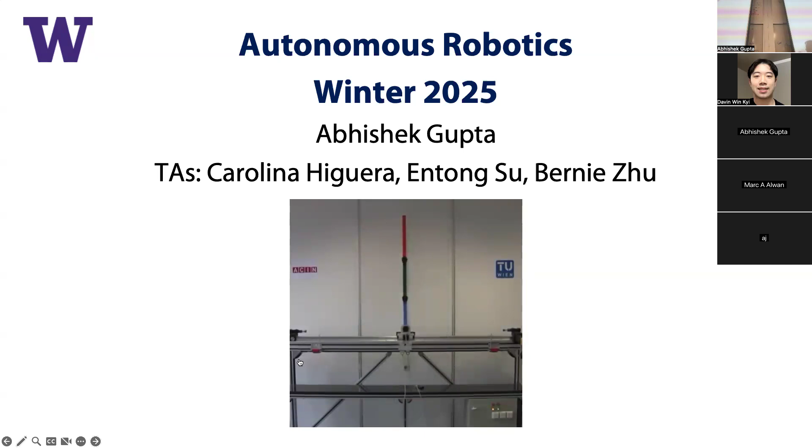This is an example of a pretty classic control system. This is a triple pendulum, but you learn to control this thing to swing up and stay stable. A lot of the methods you guys will study can solve these kinds of systems.

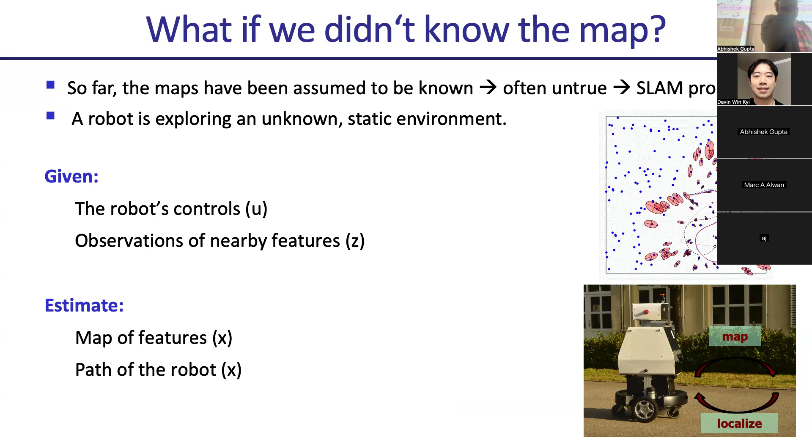So what we did so far is assume the map is known, use that to define the observation model. What we do here is try to treat the map and the position of the obstacles as things that we infer. The SLAM problem is interesting because you have to jointly infer the map and the position of the objects.

So why is SLAM difficult? In localization, what we did so far, we assumed that the map is known. The only uncertainty is coming from the robot's position. But now you're saying that the map is not known, and you have to do both jointly. It's kind of like if I don't know where I am and I don't know where the map is, then I'm kind of reading tea leaves a little bit. So SLAM as a problem is quite hard.

Unless you use learning-based methods, but SLAM tends to work really well, so you could form maps like that while you're moving around the environment.

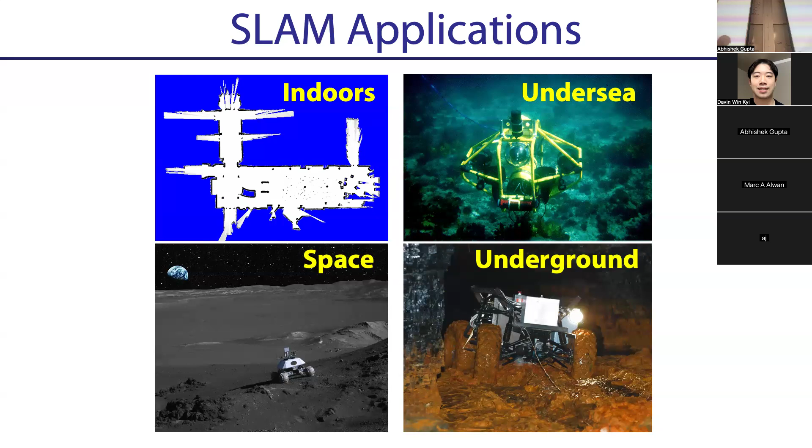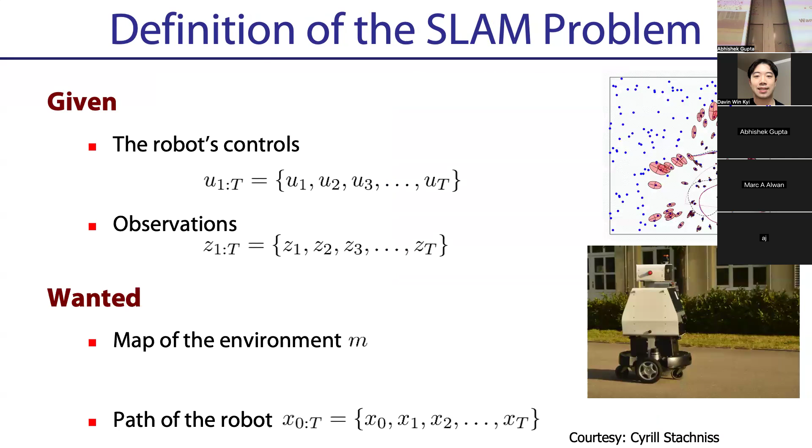So generally, the definition of the SLAM problem is that you're provided the actions of the robot, you're provided some observations, which is like LiDAR measurements in different directions, and you are trying to do inference over the map of the environment, which is usually represented as a series of landmarks, and the path of the robot, which is the position of the robot at any point in time.

And so the way you kind of solve it is through Bayesian filtering. You treat it like a Bayes filter, it's just that you expand the state. So you treat it as the normal Bayes filter, but instead of just treating the state as the position and orientation of the robot, you also include the position and orientation of the landmarks as part of your state. You're doing inference over not just the position of the robot, but also of the landmarks. And so you can use the whole machinery from before, you're just expanding your state.

We won't have time to go into EKF SLAM in detail, but the point here is that you're going to try to have your state space be something like X, Y, and theta, like before, but also include the position of all the landmarks — landmarks being obstacles in the world or special features you're trying to find. So you get X, Y, theta and the position of all the landmarks, and you're trying to estimate a belief over this whole thing. The belief is going to be no longer three-dimensional, but 3 plus n times 2.

If you want a more detailed version of this, look at my slides from CSE 571. I have two lectures on it, but we won't have enough time to go over it here.

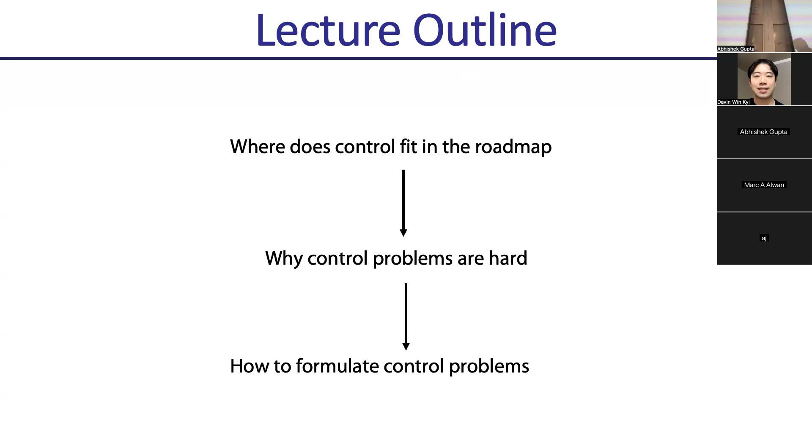Let's start by going back to the helicopter from lecture 2. We had this loop where we said we're going to have a world model. The world model tells you how the world works—it's a simulator. And then we said the world model needs to know the state of the robot to predict what's going to happen forward, and that's what state estimation does. State estimation says, given what you've seen, this is where we think the robot is. You stick that into your world model, and the world model will tell you, given this is where you think you are, if you take this control, this is where you're going to be in the future.

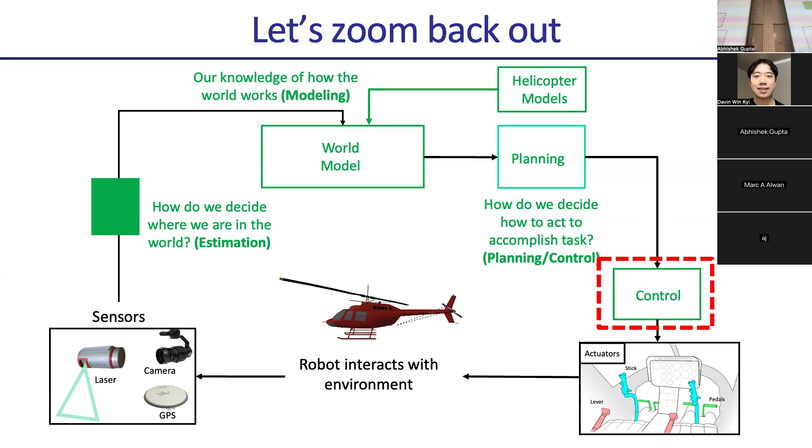What planning does is, given your world model and your state, decide a course of action. Like, let's say I'm going from here to the Ave—I navigate to the fountain, then navigate somewhere near the Red Square, then cross the bridge, and so on. So planning gives you a relatively coarse path, and control is what lets you control your joints to actually follow that path. So the difference between planning and control is really a granularity difference, but the methods are a bit different.

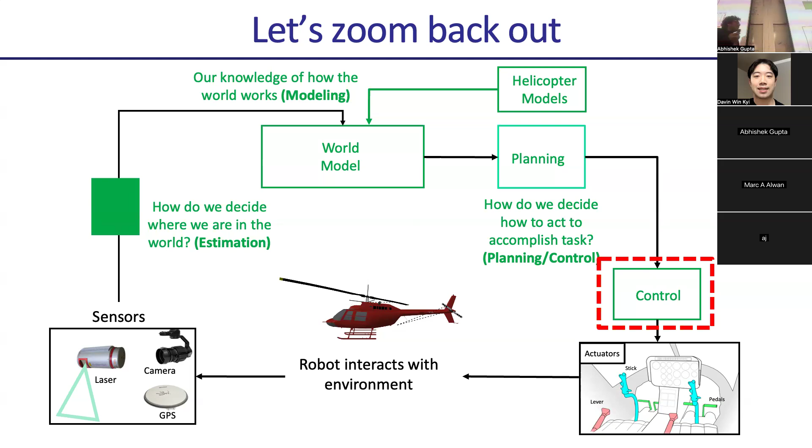So we're really going to think about control, which says that once you've done planning, you know what path you want to follow—how do you follow that path under disturbances, under noise, under model error? We're not going to worry about how the path shows up yet; we're just going to try to follow a given path.

So generally we have the sense-plan-act paradigm. We've started by estimating robot state, then you do planning to get a sequence of paths to follow, and then control—which is what we're going to do next—is trying to control the robot to follow a particular plan when you have disturbances or errors in your model.

We tried to solve this over the last couple of weeks. We're going to assume planning is solved for now—we'll come back to it in a few weeks—and think about control. Given a path and an estimate of state, we're not going to worry about state estimation or planning. We're just saying, given a state and where you want to go, how do I follow the path under some disturbances?

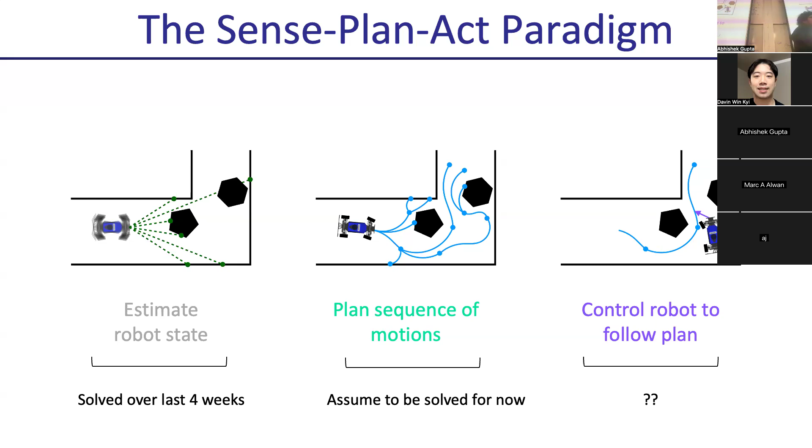One way to think about control: in state estimation, you were sitting in the passenger seat, saying the system is going to be driven—the controls of the system were given, and we never thought about controlling the system. Now we're going to move to the driver's seat. We're going to say, hey, we can actually control the system—what do we control it to do? It's kind of like moving from a passive sensing paradigm to an active one. You want to act in the world.

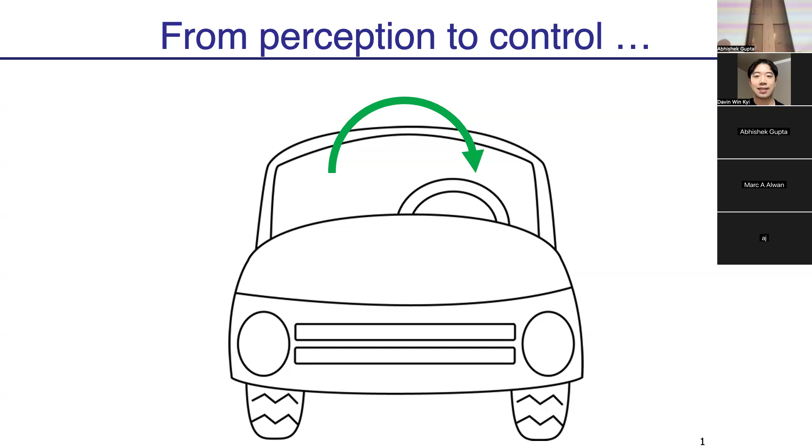So what do we get from control? Well, hopefully we can get things that look like this—this is like an extreme parking situation. That was kind of cool. So it's this car that's trying to reverse park.

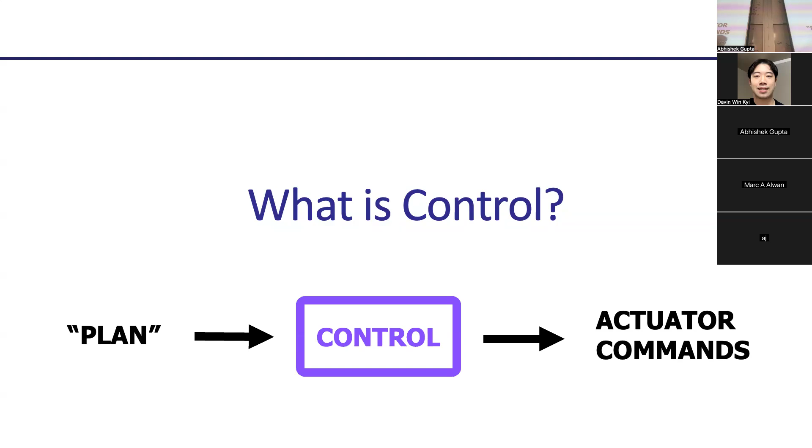So what is control? Generally, control is saying that you have a plan. You want to figure out how to map to actuator commands under some set of disturbances in your environment. You'll assume you know a model of the world approximately, but you're trying to figure out how to use that model to achieve waypoints. You're not going to do global planning. You're going to try to achieve the next waypoint, which is local, short horizon.

You're trying to track this path, so we're going to try and do control problems that are tracking problems. Often you'll have like a helicopter with a charted path, and you want to do it under disturbances. This is called our reference trajectory. A reference trajectory, the first way of thinking about it, is that at time step t, you want x to be something, y to be something, and theta to be something. It's defined as a time-varying function of x, y, and theta. We need to figure out what controls we'll feed into our system in order to accomplish this path.

So now the question is, why feedback? We're talking about feedback control. When I say feedback, I'm talking about a system which acts, takes in its errors, goes back into the system, and changes its behavior. Why feedback? Why not just say, given a model of the world, like the kinematic car model we talked about, why not just choose the best U, choose a sequence of U's that accomplish a trajectory, and just run them?

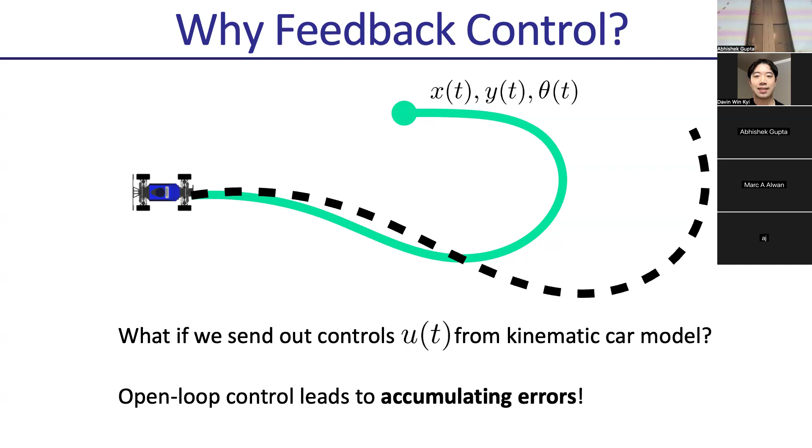We deviate and then... exactly, exactly. So the challenge with doing this kind of open loop control is that it's like dead reckoning—your errors will keep accumulating. You make a little error, and a little error, and a little error, and you end up way, way off. This is harder to think about for a Roomba, which is going really slow, but imagine you're an F1 car and you're playing things open loop, the driver is not touching the wheel. That's a scary situation. In general, the idea of feedback is that because your model is wrong, because there are unknown disturbances in your system, you want to use the errors that you make in order to correct for things. You're always correcting for little mistakes. If you look at the way you drive, you typically end up correcting a lot of your mistakes constantly, and so most control systems are feedback control systems. By feedback, we mean things that use errors you have experienced in order to affect your future behavior. That's often called closed loop control or feedback control. Open loop control is just generating a sequence of controls and playing them one after the other. Open loop control is typically bad. Closed loop control lets you deal with model errors, changing systems, and so on.

The idea of feedback control is that you measure the error between your current state and your reference trajectory, and you use that to go back—you deviate this way, you go that way, deviate that way, you go back this way. The question is, how do we design a rule that goes between this error and how to control your system? The problem of feedback control is using this error in order to design how to take actions in the world.

So you have a reference trajectory you're trying to hit. You want to design a rule that goes from error to actions. That's the feedback control.

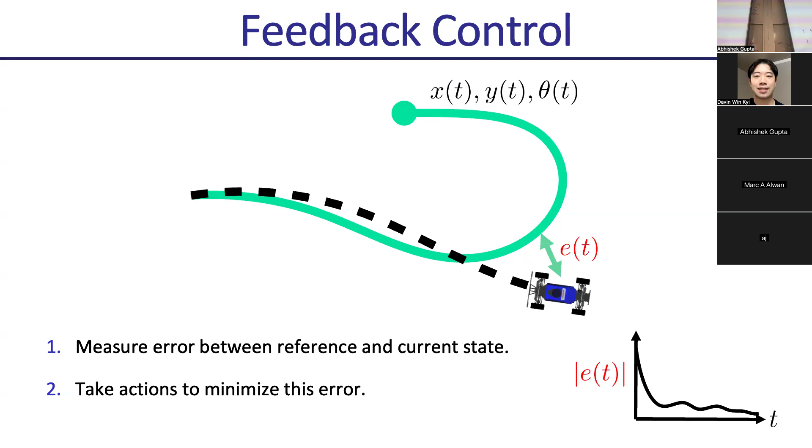One way of thinking about this, which is often useful, is to think about it as a vector field. If you're here, you would go here. If you're here, you would go here. If you're here, you would go here. So it's not saying what control to take, it's more like a rule on how to act depending on what your error is.

If you're familiar with learning, it's kind of like a policy. A policy is typically closed loop, or you can think of it as a set of rules which say how to map your error into controls that bring you back on track.

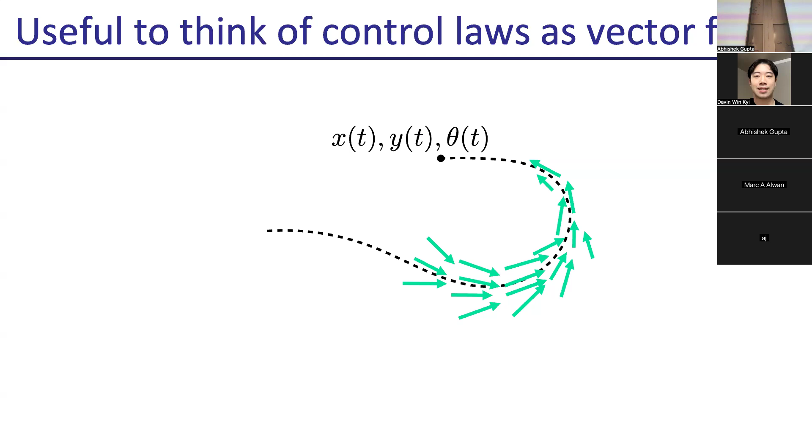So a natural question is, we've heard about control for the last 30 years. It's still a research problem. Why is this still hard?

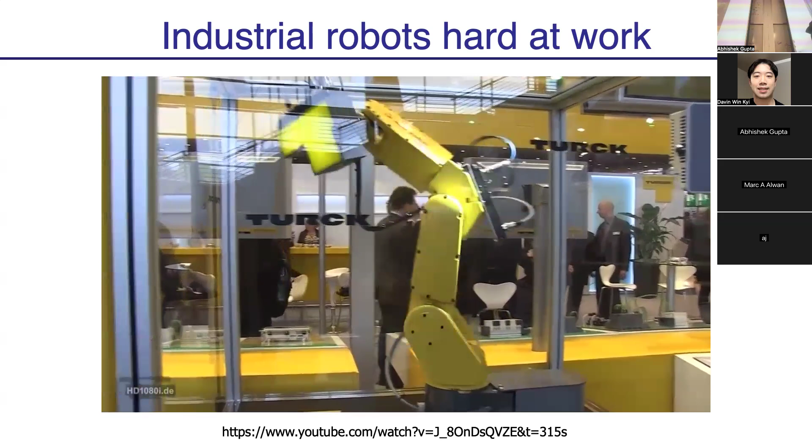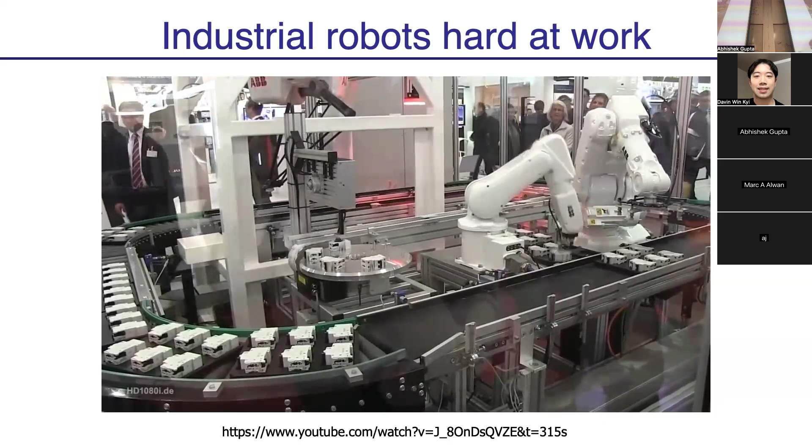If you look at a system in a factory, for instance a system trying to do packing or assembly in these nice clean cages, they often work really well. You don't have that many disturbances, your system's pretty controlled, your set of objects is known beforehand, and you don't have to be that adaptive.

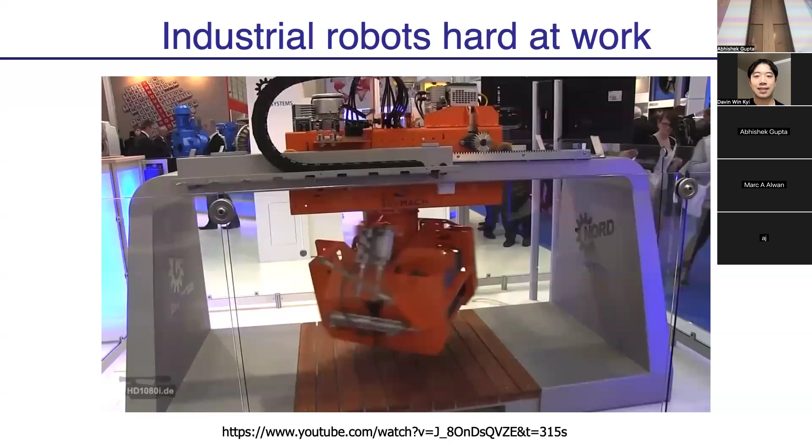You don't have to really deal with lots of unforeseen things. So you do use feedback even in these systems, but they're very controlled. The thought here is that these systems make assumptions. One is that the system is fully actuated, you can control everything in the system perfectly.

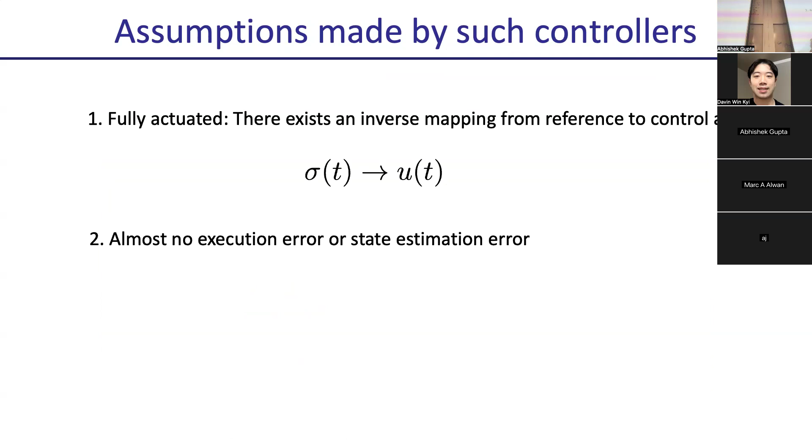Secondly, there's very little execution error. You buy these $200,000 robots, they repeat the same thing over and over. You go to the robotics lab, our robots cost $500, and they make lots and lots of errors. They don't cost $500, but more, not 200,000.

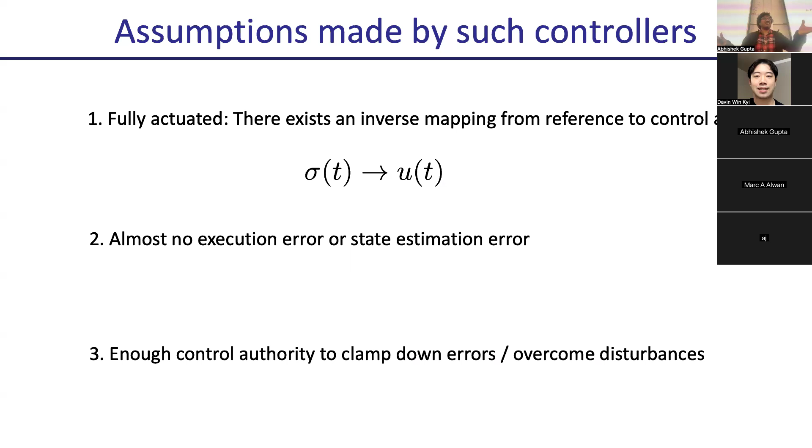And because the environment is controlled, you can kind of kill the errors and disturbances in your system, because it's a factory, you can control the factory. But if you're like Boston Dynamics and you're trying to get your humanoid to jump and do backflips and do flips, that may be a significantly different system.

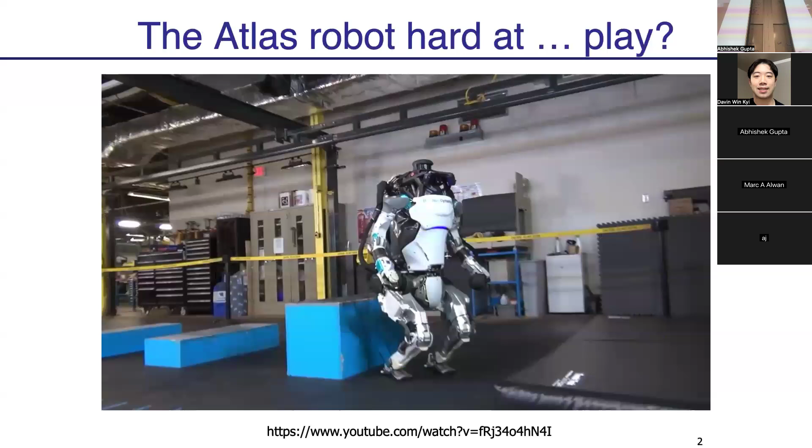So what makes it different? The first thing is that your system is not fully actuated. You can't control everything in your system perfectly. Like for instance, you're trying to pick up an object and you're trying to play tennis, you can't actuate the ball perfectly.

It's an inherently under-actuated system. When you think of an under-actuated system, it's a system where you don't have direct control over all degrees of freedom. Right now, this clicker is fully actuated, I have full control over it. But if I think about pushing this thing on the table, that's an under-actuated system, I don't have full control over it. Most systems in these high performance environments are under-actuated.

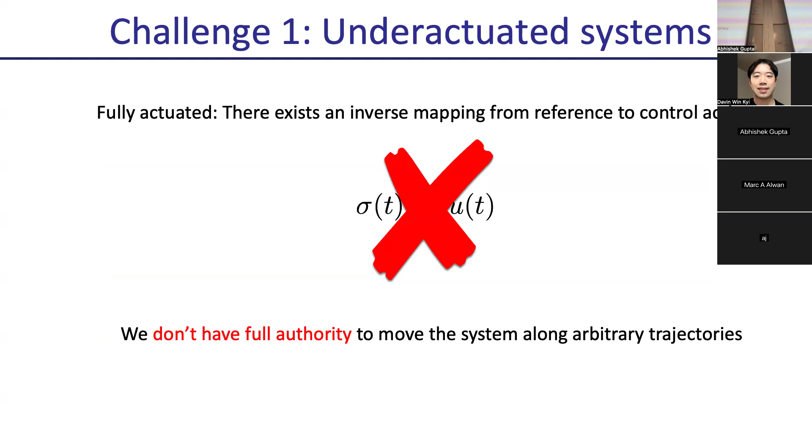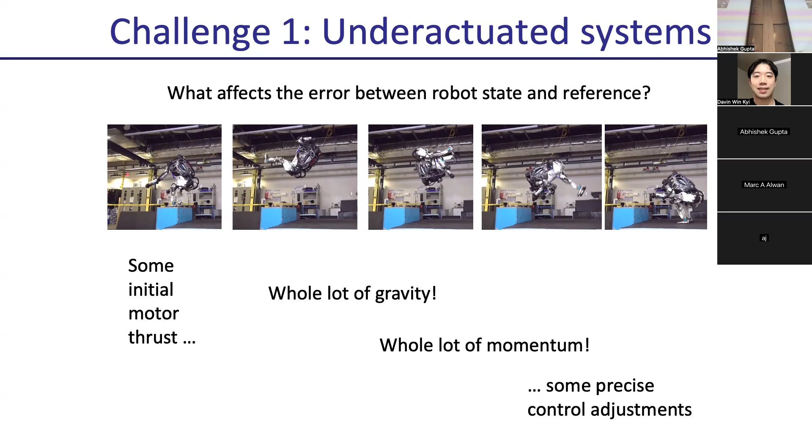And so you can't just teleport to where you want to teleport. You have to obey the dynamics of your system. Under-actuated systems have gravity, momentum, and so on, but you have to use those in order to do a backflip. You can't just directly set the system to where you want it to.

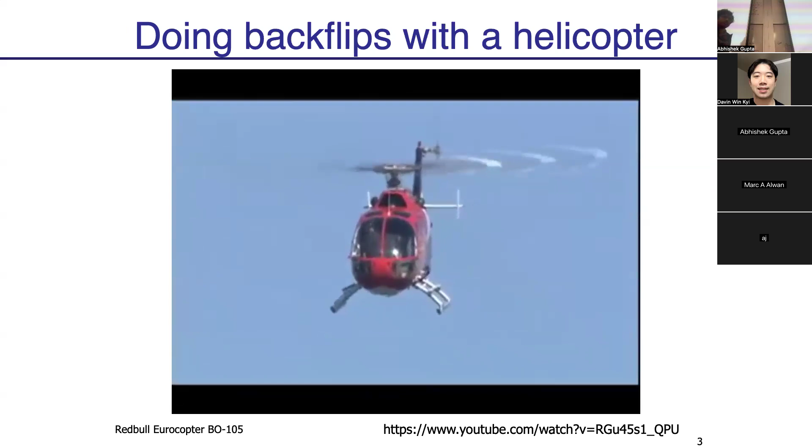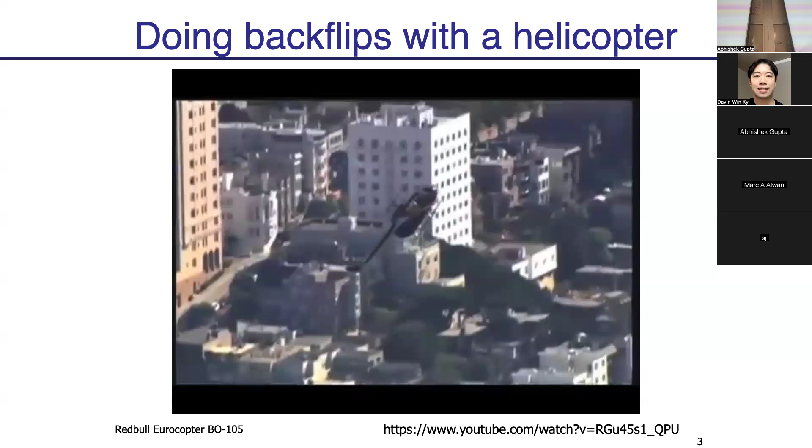The second thing is that you don't really know the model of your system perfectly. For instance, in a helicopter, if you're trying to do backflips, you can build models of your system in certain cases. But let's say you're trying to do backflips in extreme conditions, there's wind, there's drag, there's things like that. It's very hard to model those exactly.

So in most cases, your system model is going to be approximate, which means that if you did planning through that system, it's inherently going to be wrong. If you made a bunch of assumptions and planned into the wrong model, you're going to get the wrong control. But the thing that makes feedback control so beautiful is that it's saying wrong models can still be useful when used with feedback that allows you to correct for model error.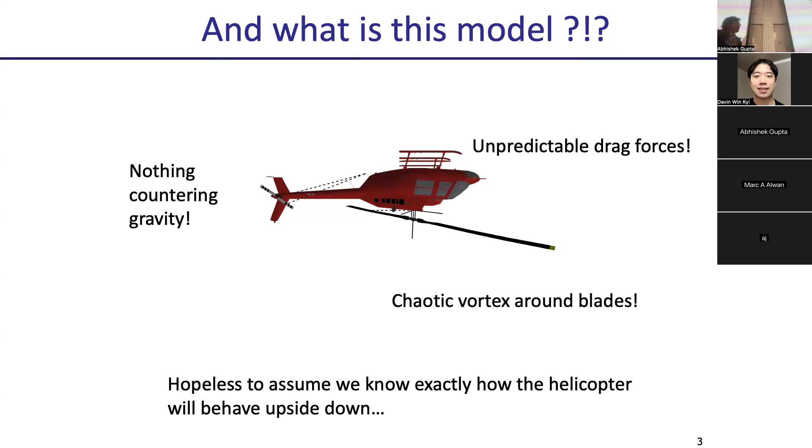The idea is that you can make errors that you will fix in the future. It's like lazy optimization - you're saying I will be okay now because I can correct it in the future. So you're never trying to be perfect in feedback control, you're just trying to be good enough. Even with an approximate, simple model, if you have feedback you can get a well-behaved system. Even if you have a system that's behaving chaotically, as long as you're able to continuously correct for the errors, you'll get a well-behaved system. That's the basic premise of feedback. Does it make sense?

People will keep trying to build better and better models. I think that's maybe the wrong way of going about it. You want to build a model that's good enough to do control. At least in our cases, we don't care about modeling the system perfectly, we just care about it being good enough to control it. And feedback lowers the burden on modeling - the more you have feedback, the less well your model has to do.

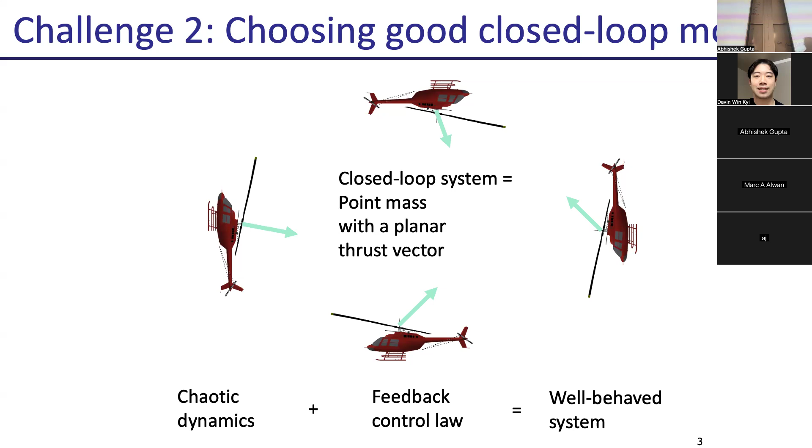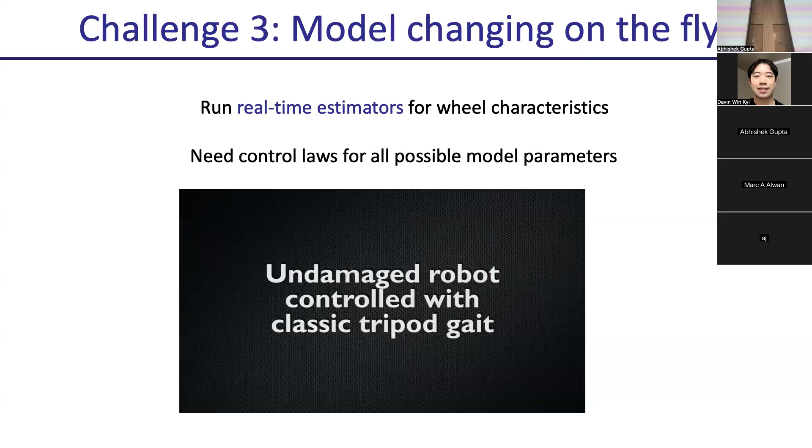The third situation is that often models change on the fly. I was at the DARPA meeting this weekend, and they were talking a lot about robots that are in the field get damaged, and what happens to them then. Here's an example I really like from some folks at Wyoming: the spider robot that gets damaged, but you can see it no longer can walk straight because it's damaged. The model has changed, but it tries to estimate how its model has changed and adapt on the fly. In some ways that is a feedback controller - it's feedback of what changed in the world and adjusting its behavior accordingly. Systems will change on deployment. You deploy a robot for long enough, something will change. Feedback control lets you deal with these kinds of changing models.

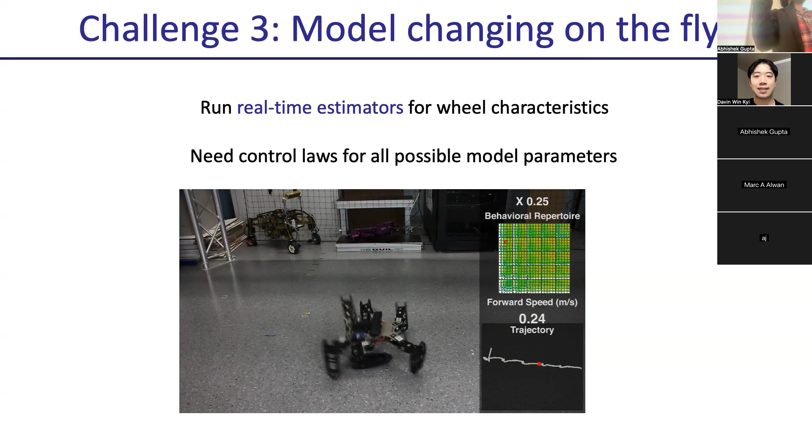Given that, let's think a little about how to ground this in real time. We're going to try to follow a trajectory. We have a car, the state is X, Y, and theta, same as we did before. Now you want to follow a trajectory - the question is, how do you parameterize the trajectory? The first thing we said is we have a time parameterized trajectory. At time step t, you want your system to be at a particular X, Y, and theta. So you have a time parameterized function that tells you exactly where your system is going to be at any particular time. What might be the problem with this parameterization? Why is it not perfect?

Car is slower than expected. Right, if your car is slower than expected, or you have an unexpected obstacle, you're going to end up with this kind of irreducible delay, and you can't really fix it.

Sometimes you really just care about following a path, you don't really care about getting there at a particular time. So a second option here is to do, instead of a time parameterized trajectory, an index parameterized trajectory. Rather than saying I'm going to be at this state at this time, you just want things to be followed in sequence. Let's say you defined k different points in the sequence - you're saying I just want to get to the next one, and after I get to this one, I want to get to this one, and so on. So an index parameterized path doesn't care about time, it just cares about following things sequentially. The nice part about this is that it gets the geometry right - it follows the path you want to follow. The con is that it's untimed - it may be slower or faster than you want it to be.

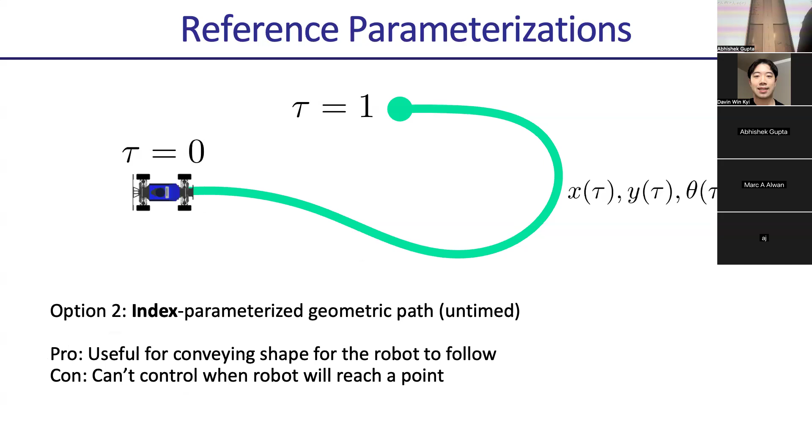Okay, so these are just design decisions you make in a system. Let's say you're a train and you really need to cross another train at a particular point in time, otherwise you're going to crash. You should probably be time parameterized. But if you're like an RC car in a little hallway, probably better to be index parameterized. So it kind of depends on your problem.

But the way we're going to do this is we're going to start by first getting a path to track, then picking a reference state. Let's say your path was like this, and your robot was here. You want to find where you want to go to - that's your set point or your goal, your reference state. You compute your error between your current state and your reference state, and then you try to think of a controller that'll get you back to your reference. So feedback control is typically: take your path, find a reference state, take your current state, find the difference between your current state and the reference state, and then control your system to accomplish that.

And so every controller is going to make some choices. How do you parameterize a path to track? How do you choose which state to go to? How do you compute the error? And then how do you compute the control law to minimize this error?

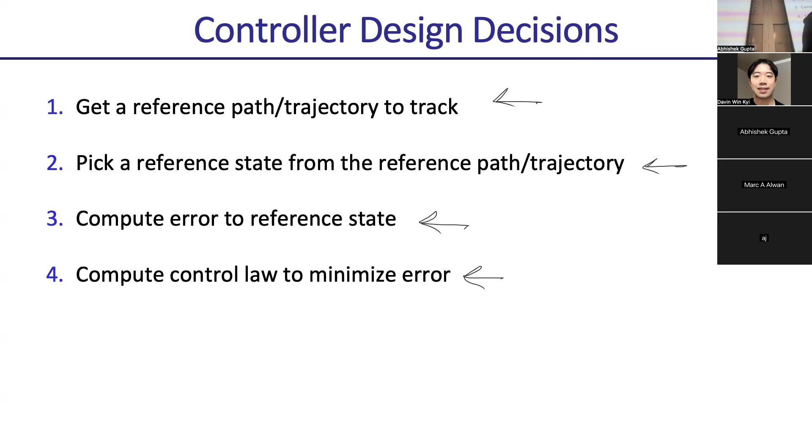Good. All right, so we talked about how to parameterize paths. The next question becomes, how do you choose a reference state? How do you choose where to go back to? So what are thoughts? Let's say you have an index parameterized path, and your state of the world is now X, Y, and theta. How do you choose the reference state? How do you choose what to get back to?

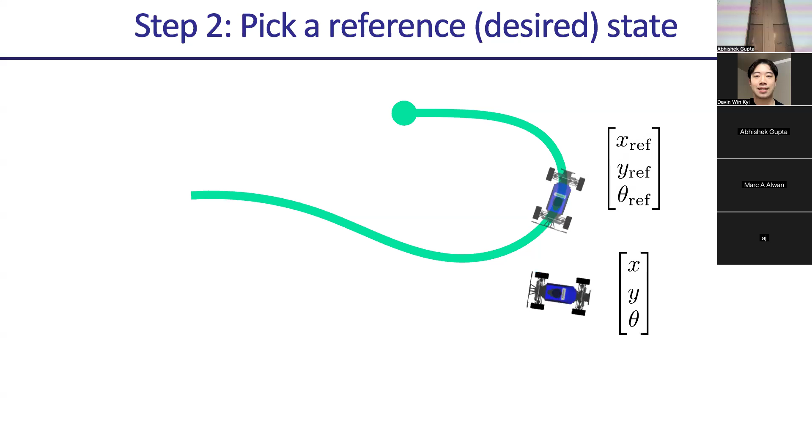Minimum distance from the path. Got it. So the first option is choose a single state that is closest to your current state. You say your current state is X, Y, theta, and you try to choose an X and Y from your path that has the minimum distance from your current state. That's good in many cases.

Why could it be bad? You can keep oscillating, yeah exactly. The other option is if your momentum is taking you this way, but the closest state is this way, you've got to go backwards. So it's not always the best to choose the closest one. What's a different option?

So maybe a different alternative here is a look-ahead search, which is saying you take your X,Y, but find another point, your look-ahead point, which is not the shortest distance, but which is L steps ahead of your current time. This is where you deviated from last, and you pick something ahead, L steps away. You don't want this to be the shortest distance, you don't want it to be zero, you want it to be some L steps ahead. And that often works well. I think that's what you'll do in a lot of your homework.

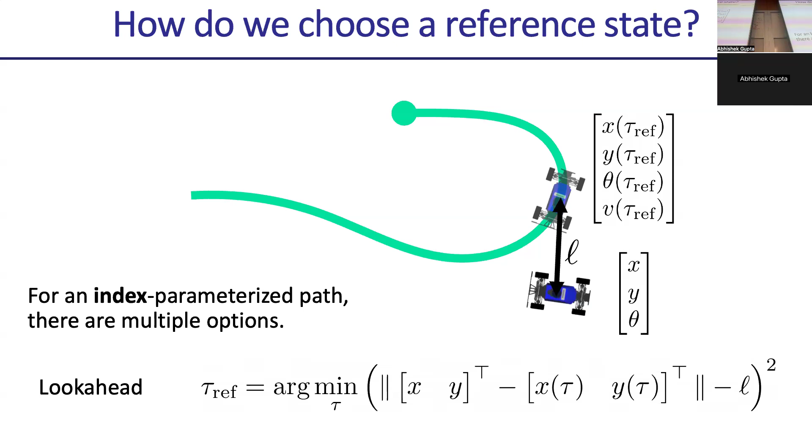You're good, thank you, I appreciate it. How do you think the presentations were? Do you think they were good? Do you think they were constructive using class help? I did.